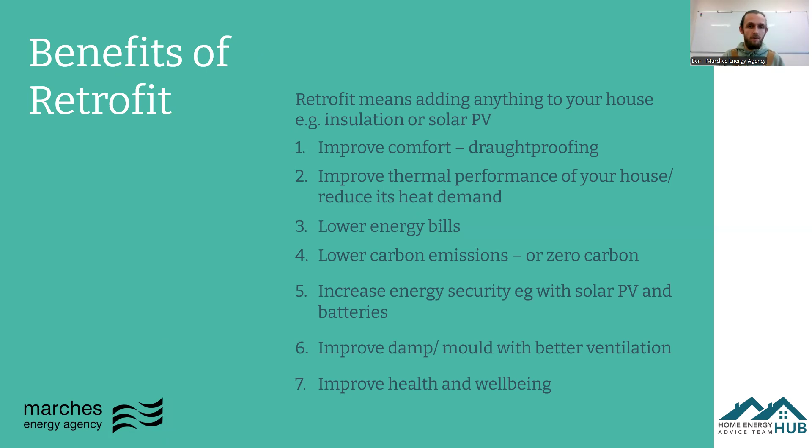In terms of this project, the Heat Hub project, we're covering quite a number of bases. There's a big piece around raising awareness and education, and delivering retrofit advice, particularly in person, as well as being able to scale up and push forward the retrofit agenda to decarbonise across the UK and look at what we can do in Derbyshire.

We've been running various educational events and webinars, practical workshops, signposting to grants and green finance options that are available, delivering retrofit surveys and tailored home retrofit plans, which I'll touch on in a bit more detail in a moment. There's also installer engagement and working with the supply chain to build that up, as well as publishing resources and case studies on best practice of what we're seeing in the region.

If you are watching this webinar before the end of March 2025, I want to take this moment to promote our package of support that we're offering to give bespoke one-to-one advice to homeowners interested in retrofitting their own home. This package is basically a retrofit assessment or survey and a report of recommendations to follow up with, giving you tailored advice and guidance as to how you could go about improving your home to decarbonise, lower your energy bills, and improve your comfort.

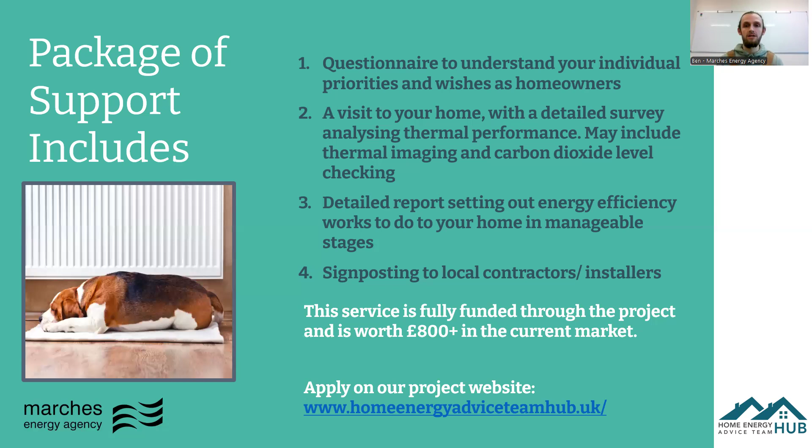Without further ado, let's dive into the real content of this presentation. In the live version this would be interactive, but as it's just me and you're watching the recording, I'll tweak how I go through it.

So how do you know if you have a solid or a cavity wall? If your home was built before 1930, roughly, there's some deliberation around this because it varies, but it's likely to be a solid brick wall. The exceptions can be if you're in a coastal region or exposed area, like on top of a hill with lots of driving rain, where you may have a very early version of a cavity wall to reduce moisture ingress into the home.

The brick pattern, as we've seen, is a common giveaway of the construction type. But usually, if an assessment is being done to determine the wall type, it's determined by the wall thickness. If it's a brick wall over 260 millimeters thick, excluding any render, cladding or plaster, then it's likely to have a cavity. If it's 260 millimeters or less, it's more likely to be a solid brick wall.

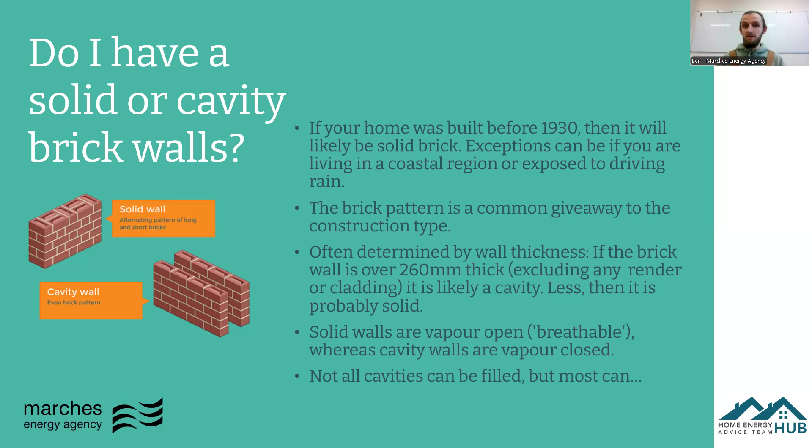In terms of cavity wall insulation, which many of you watching may be querying about, most cavities can be filled, but there are some exceptions. Let's go into a bit more detail around that.

The times you wouldn't want to install cavity wall insulation would be if there's any frost or structural damage on the outer leaf in particular. If there's any spalling, cracking, or structural damage of any kind, it would be best not to fill that cavity, as it could lead to further unintended consequences.

If there's any evidence of rising or penetrating damp, particularly in the inner faces, this can be quite a major issue, and adding insulation could end up making it worse. Also, if the insulation becomes damp and soaked, it won't perform as well thermally either.

If there are any obstructions in the cavity, this is also not a great idea, and will generally hinder you from installing that insulation effectively, since anything inside the cavity would block the insulation from filling the whole space—you want a consistent fill all the way around.

In very rare cases—and I'm only mentioning this for the off chance you live in a property with this condition—if the cavity is actually used as a source of combustion air for a flue, for ventilating something like a stove or wood burning unit in your home, you wouldn't fill it. But this is very rare to see.

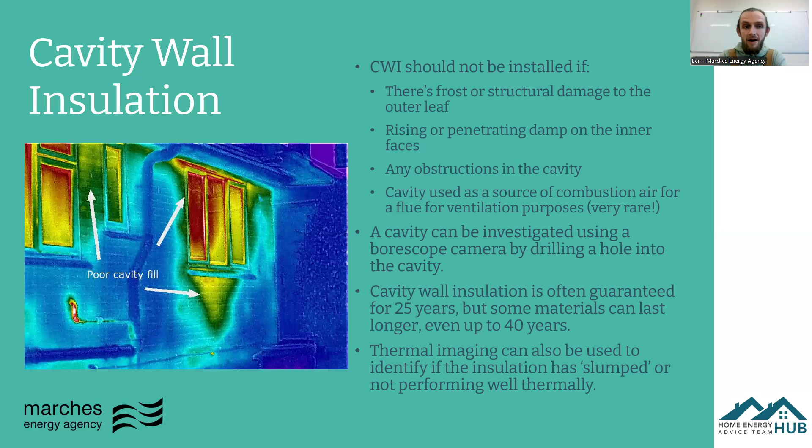I've added this image on screen, which gives an indication of how cavity walls can be poorly filled at times. You can see from the thermal image the areas in green and yellow, showing where the insulation is not filled underneath or around the top of the window, or between two windows that are close together. That's where you'll get a great amount of heat loss. This is something we may pick up through a survey at your property, and it's good to know how well your cavity wall insulation is actually performing.

Within this presentation, we're looking at cavity wall homes, not just the wall type and what to do with the walls, but also what you do with modern homes of cavity wall construction in general. We want to look at all elements, including windows, doors, roofs, etc.

I've picked out a few things here from the starting point of what to look at when considering retrofit, which is maintenance and repair. There's no point trying to add loads of insulation or install new technologies if your home is in disrepair and some basic maintenance work needs to be done to make sure it's performing as it should.

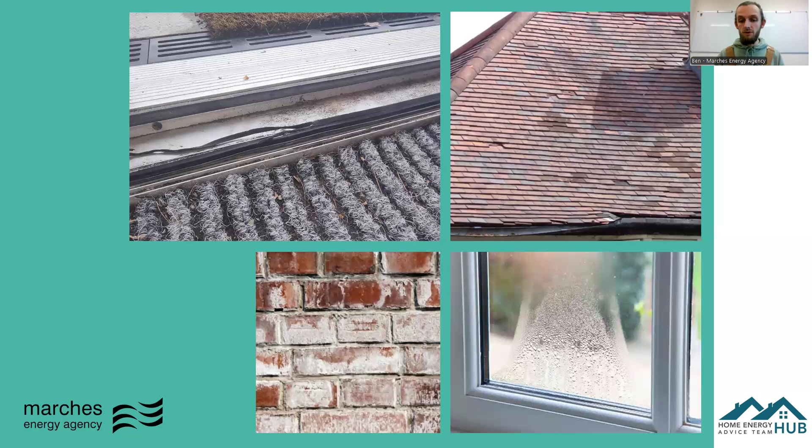Which essentially just means that the window is not going to perform thermally as it's meant to, as it used to, so more heat loss will be going through that window. So these are the kind of issues that you may want to be thinking about addressing.

So key things to look at are, like I mentioned, rainwater goods, your roof, have any tiles slipped, how are the walls, what condition are they in, do they need repointing, is there any cracking or vegetation growth, and your windows and doors, are any seals split or missing, have the glazing units failed. These are really key things to address if you're aware your home has any of these issues before considering any kind of deeper retrofit works.

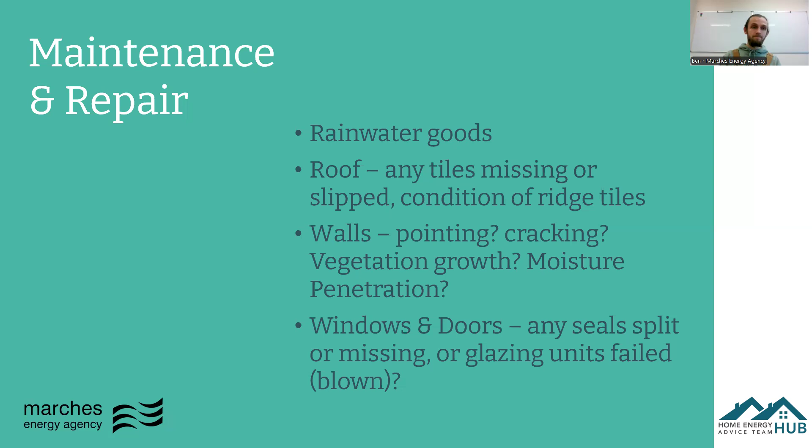And the next thing I wanted to speak about is airtightness. Some of you living in a cavity wall home may think, oh well, heritage properties are really drafty, and they're the only ones that need to concern themselves with airtightness, with their single glazing windows and old barn doors. Well, you'll be surprised actually how poorly airtight your post-war cavity wall home could be, as there are so many ways that air leakage can occur.

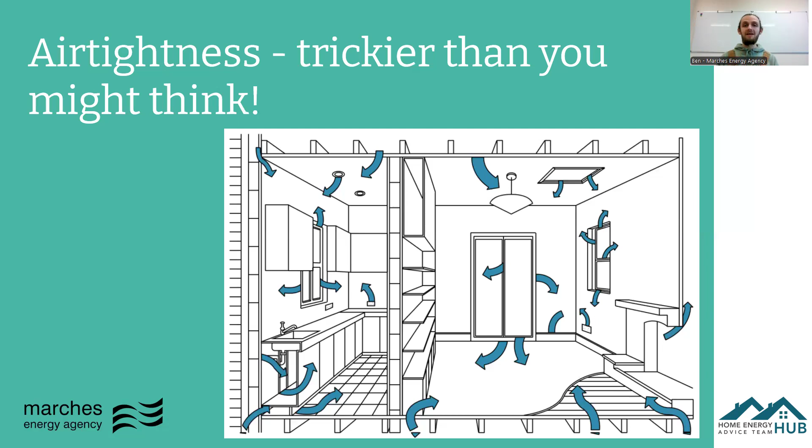Then you're going to be wasting your money, and it would be far better spent addressing your airtightness first. So you can test your airtightness quantitatively using a blower door kit, doing an air pressure test. This is basically where a very large fan is placed on your door, and it's either pressurized or depressurized, and then it's tested as to how quickly that air in the property is either leaving or entering your home. It can also be used as a diagnostic tool to identify where the drafts might be happening. So it's a great thing to be able to do.

The Marches Energy Agency are seeking to be offering air pressure tests, as we've recently purchased some kit. So do watch this space, as that service could be available sometime soon.

You can also do it in a very low cost way by just feeling with the back of your hand on a windy day and seeing where drafts might be coming through, putting your hand, say, next to a window or around the bottom of your door, anything like that, to try and identify where drafts might be coming through to address them. But the usual suspects would be windows, doors, service penetrations, etc.

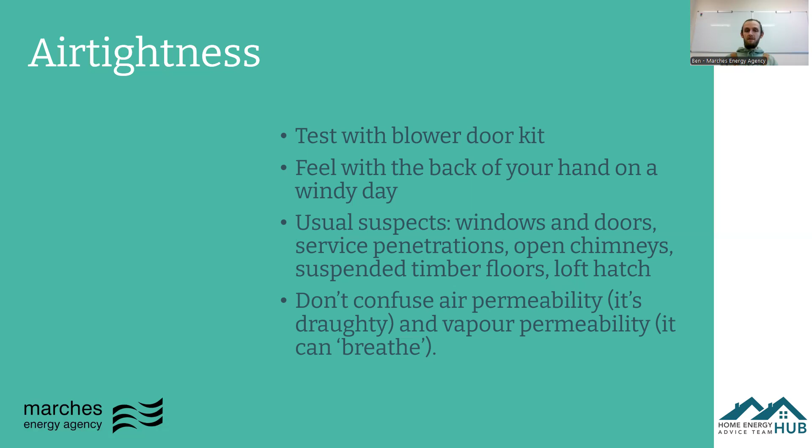But don't confuse air permeability with vapor permeability. Air permeability is when there are actual physical gaps around building elements where air is moving through, whereas vapor permeability is around how moisture tracks through materials, aka breathability. So if you're living in an older home with a solid wall and wanting to maintain that breathability, that's what we're talking about with vapor permeability, but not air permeability. So they are two different things.

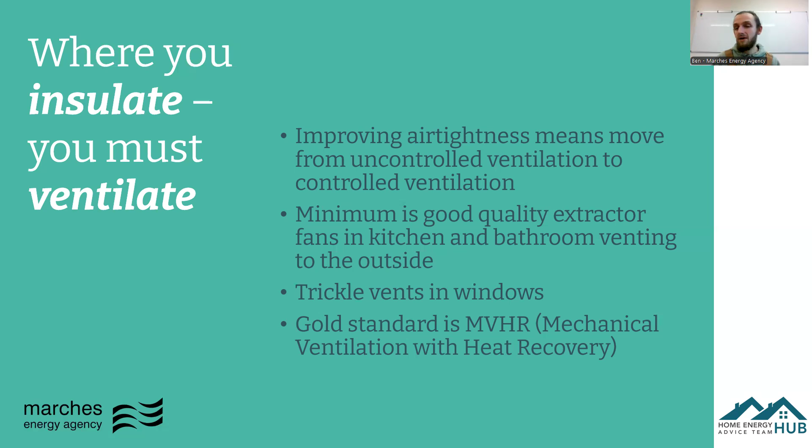So if you really want to go for it with your ventilation system with your retrofit project, to completely minimise, or as much as possible minimise, your heat loss, then MVHR may be the way to go. But otherwise, mechanical extractor fans in the wet rooms is a good baseline.

So now you've dealt with any remedials and repair work on the property. You've looked at the air tightness and improving that. You've probably already got some loft insulation, most likely in a more modern home, and your cavities filled. So you're thinking, okay, well, I've done all the fabric works to the physical elements of the house. What's next? How can I further decarbonise?

So the next step may be for you to get a heat pump. You may have heard quite a lot about heat pumps, and we do have plenty of content and resources which give a lot more detail around these. But in short, essentially how they work is kind of like a refrigerator unit, but in reverse, because it has the refrigerating liquid in it. Essentially it's taking what energy there is in the outside air and removing that to then heat either a water system or an air system to then heat the home. And this runs on electricity. For every single unit of electrical energy used, it can produce quite often 3 to 4 times that of the amount of units of heat energy. So basically, it's 300 to 400% efficient compared to a gas boiler that might be 90% efficient.

So are they noisy? This is a big question that gets asked. I've seen plenty of heat pumps in action in homes across Shropshire, for example, and I wouldn't say they're noisy at all. Most heating systems will make some kind of noise, even a gas boiler on the inside of your home, and you'll hear a gentle whir while it's on over the winter months. And I think the key thing that I've heard from people that live with them is, say, in the coldest weeks of the winter, a couple of weeks in early Jan, where it's really frosty and it's -5 degrees, and the heat pump is having to work a lot harder, then it's a bit louder during those periods.

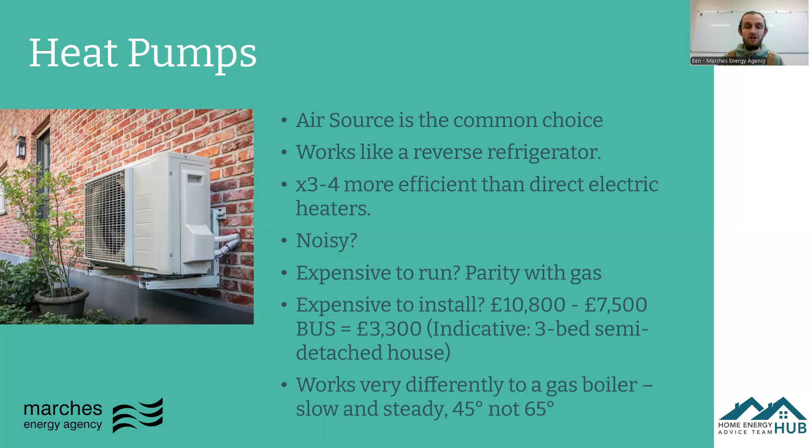So from there, you might be considering generating your own electricity, through solar panels and battery storage. Solar panels will work pretty much on any roof apart from north facing. A lot of people think only a south facing roof can have solar panels, but even on east and west facing roofs they can work just as well - not to the same intensity, but they can still work really effectively.

And if, say, you have a pitch which has aspects on east and west, and you have panels on both sides, then you get an even distribution across the day as the sun tracks across the sky. So it's still really effective if you've got a south, east, or west facing roof.

And they are cheaper than you might think. I remember a few years back learning about solar panels in school and university, and it was considered a really expensive option - around £50,000 for a typical homeowner to invest in solar panels. But now you could expect to pay maybe £6,000 to £10,000, depending on the amount of panels and the size of the array. So it's really affordable now, and considering the savings you can get from generating your own energy, as well as exporting it back to the grid for any energy you're not using through the smart export guarantee, it can really be a no-brainer.

When you combine that with a heat pump, if you've installed one, and battery storage, and have a time of use tariff that more energy suppliers are providing, plus an electric vehicle, you can see some really significant bill savings. We've seen studies from other partners modeling 85% bill savings through this kind of method. It's really impressive what can be done if you're willing to invest in green technologies and go the whole hog.